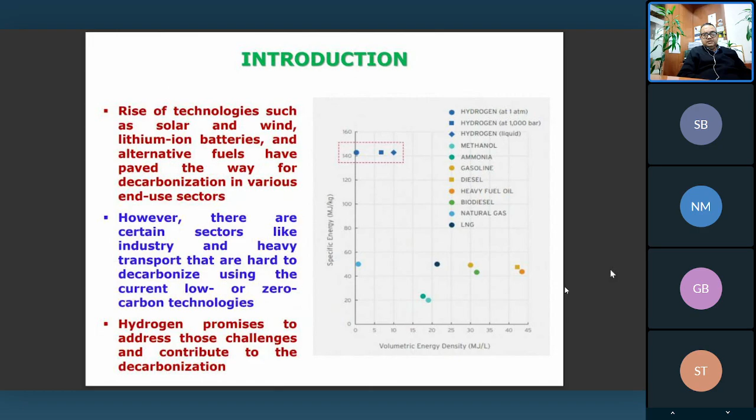So in the next slide, this is the introduction, about how non-conventional energy sources like solar, wind, lithium-ion, fuel cells, hydrogen cells, and other alternative fuels we knew earlier, like wind power, hydro, geothermal, are coming into the picture, through which we are working to decarbonize or mitigate the carbon emission problem under the UN SDG goals.

This is the graph of volumetric energy density versus specific energy, where you can see hydrogen. There are three hydrogens in our circle; one is square, one is rhombus. You can see that specific energy is highest in the case of hydrogen. That's the reason it promises these challenges can be mitigated if you properly go for hydrogen, and that too green hydrogen.

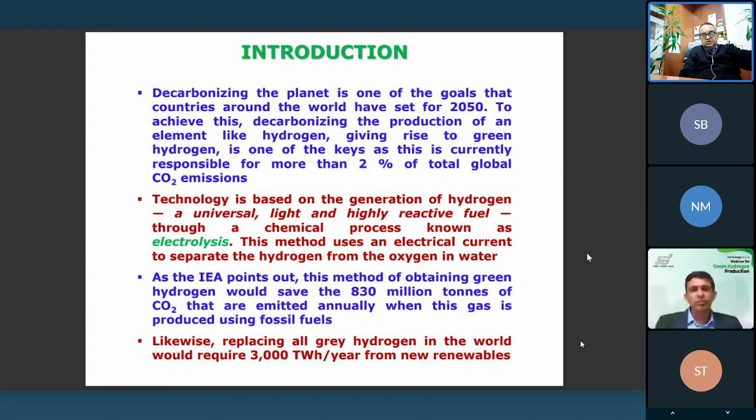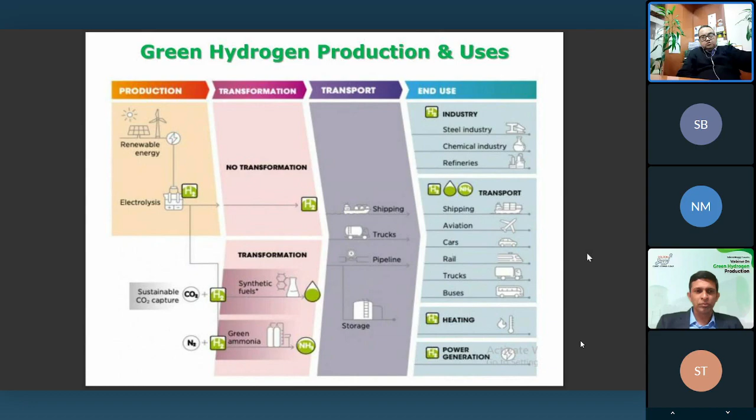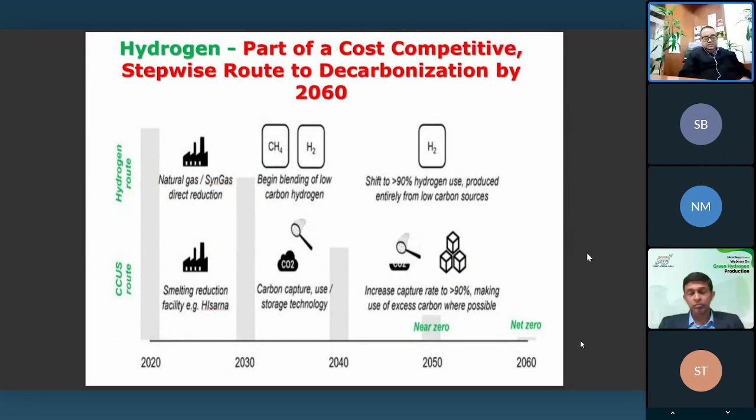However, in the CCUS route, we are using the smelting reduction facility. One example I am showing here is HIsarna. Here carbon capture, use and storage technologies are there so that we can increase the carbon capture rate to more than 90%, making use of excess carbon wherever possible so that we can achieve net zero by 2070. Our emphasis is 2070.

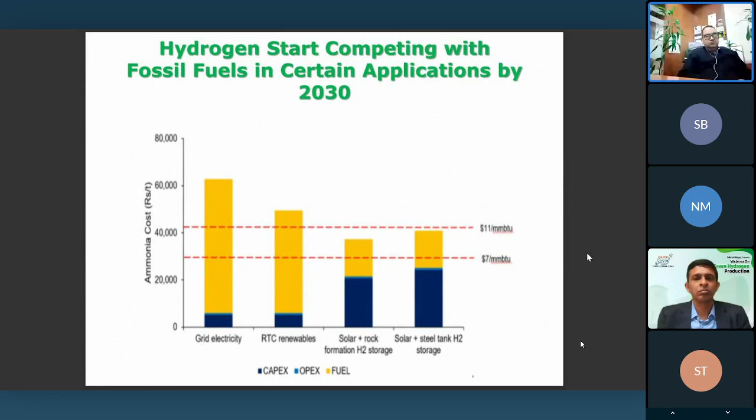So, Dr. Pranjal, do you think the cost today of green hydrogen is high because the cost of renewable energy that we are getting by itself is high? Is that the reason, or is there any other contributing factor? No, there is no other reason. See, the one good thing in green hydrogen production is that the raw materials are very readily available. Water is readily available, then electricity is not much of a concern. The only concern is the electrolyzer.

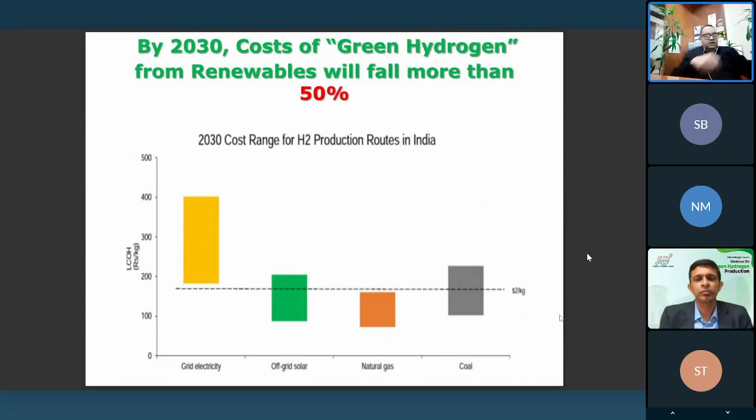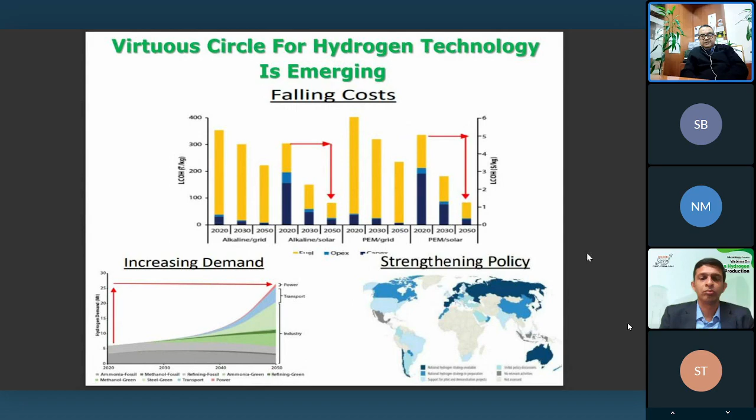In the next slide, I will show you the projected price trajectory for solar based green hydrogen production, meaning power from solar to make green hydrogen. In 2030, the price for green hydrogen is between 1.7 to 2.4 dollars per kg. RTC renewables is around 2.1 dollars per kg, and gray hydrogen is around 1.8 to 2.7 per kg.

But if you go to 2050, green hydrogen cost has dropped drastically to between 0.6 to 1.2 dollars per kg, from 1.7 to 2.4. RTC renewable is dropping from 2.1 to 0.9 dollars per kg, and gray hydrogen will be increasing. It was between 1.8 to 2.7. In 2050, it is anticipated to be between 1.9 to 2.9 dollars per kg.

In the graph, the green line is green hydrogen from on-site renewables. The blue line is green hydrogen from RTC renewables with T&D, transportation and distribution waivers. The central dark blue line is the most competitive blue hydrogen, and gray is the gray hydrogen price range. So the price of green hydrogen from on-site and from RTC renewables is dropping drastically from 2020 to 2050.

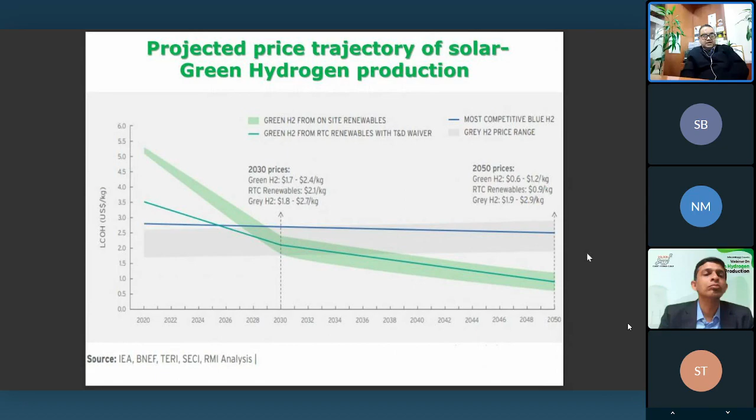In the next slide, Visionary 2030, the electrolyzer target market. So if you see, I'm showing a few colors. The blank is green hydrogen exports, blue is product export incentives, red ones are pilots, and green is mandates, viability gap funding, and addressable demand. So if you see from refineries to visionary demand target, the visionary demand target is the last one, right hand side, that is yellow color.

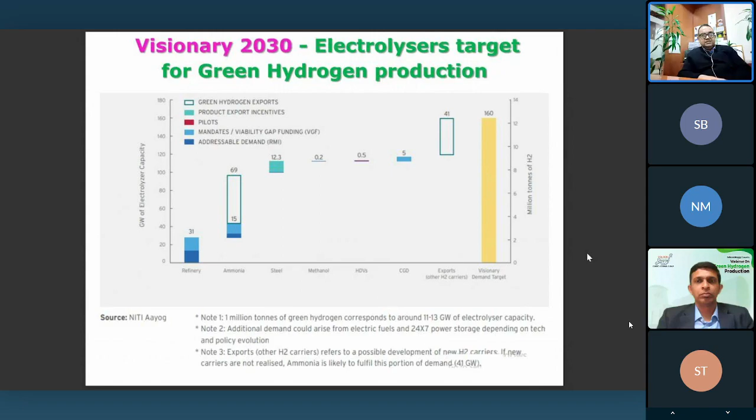So these are some of the driving forces in the next slides for the emerging economics of green hydrogen. The renewable cost will be declining globally. The global hydrogen production outlook shows that by 2050 the production of green hydrogen will be substantially higher, and exponential cost decline is expected for the electrolyzers.

I am already saying this - in case of alkaline electrolyzers or proton exchange membrane electrolyzers, PEM electrolyzers, you can see the cost decline is expected for the electrolyzers.

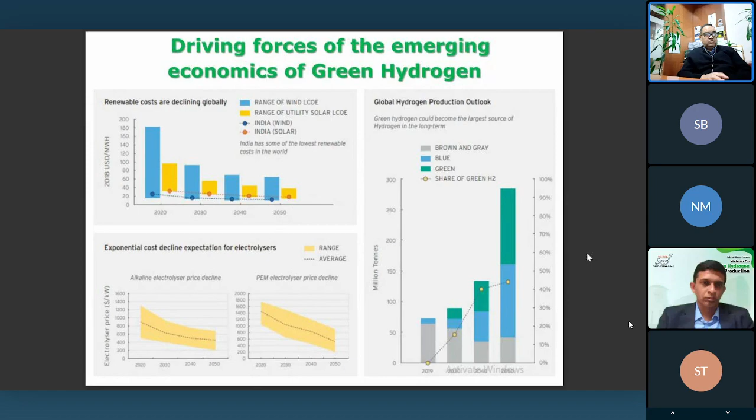If you go to current cost economics of India, green hydrogen production in India - in the next slide we have three parameters shown here, where you can see one is green hydrogen, one is natural gas based hydrogen, and one is coal-based hydrogen. So coal-based hydrogen obviously is the blue one.

This is sourced from RMI analysis, which is based on the green and natural gas, and coal-based figures from TERI and BNEF. So here you can see the green one.

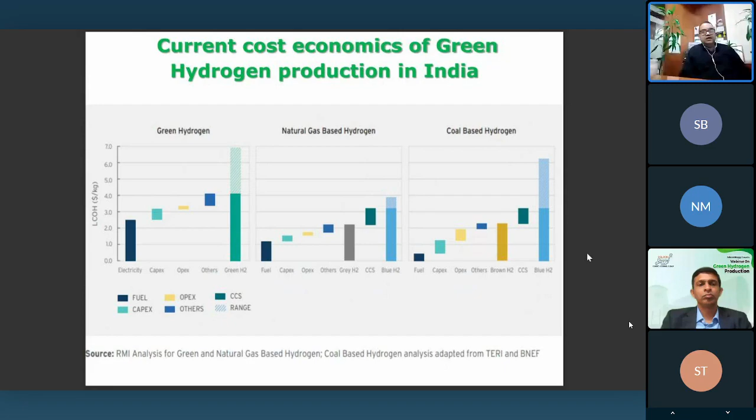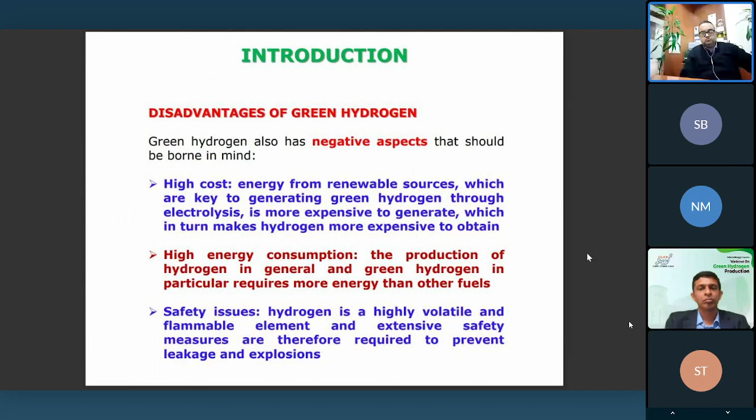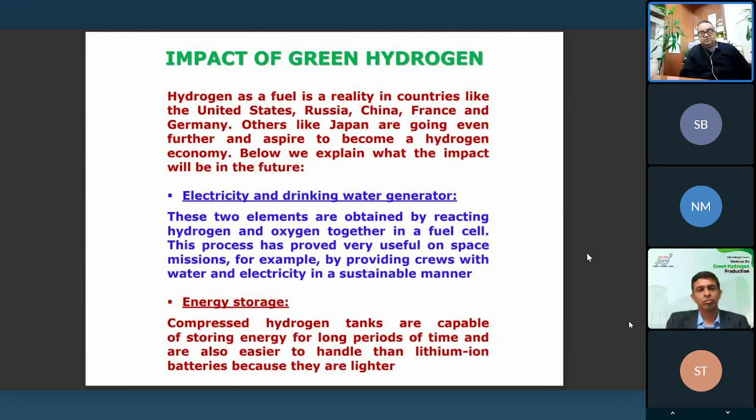What is the impact of green hydrogen? In the next slide: first, it will help in electricity production and drinking water generators. It will help in energy storage, as compressed hydrogen tanks are capable of storing energy for long periods. It can be used in tanks and trucks, and will be useful for transportation and mobility.

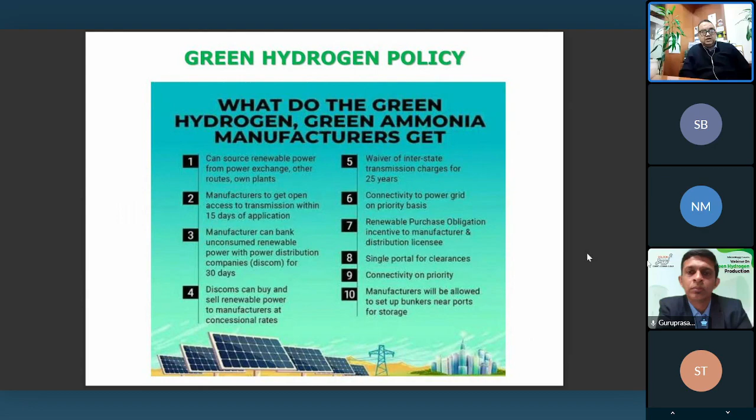Now coming to the next slide, just one more slide. I'm also seeing Ms. Neha, who will be talking a little more about the policies. Please continue. Yeah, she will speak. So next slide, just one pager.

On the technical side, the production process of hydrogen happens in four types. One is the thermochemical process, which itself consists of four types: natural gas reforming, biomass gasification, biomass-derived liquid reforming, and solar thermochemical hydrogen. Second is the electrolytic process, which we discussed. Third is direct solar water splitting, using photoelectrochemical or photobiological processes. Fourth is biological processes, where microbial biomass conversion and photobiological methods occur.

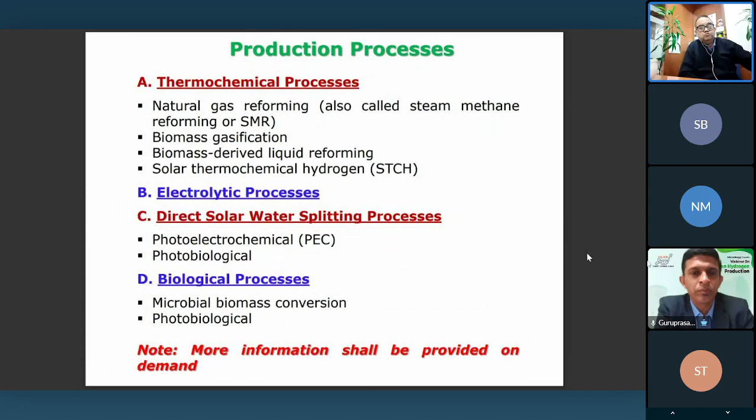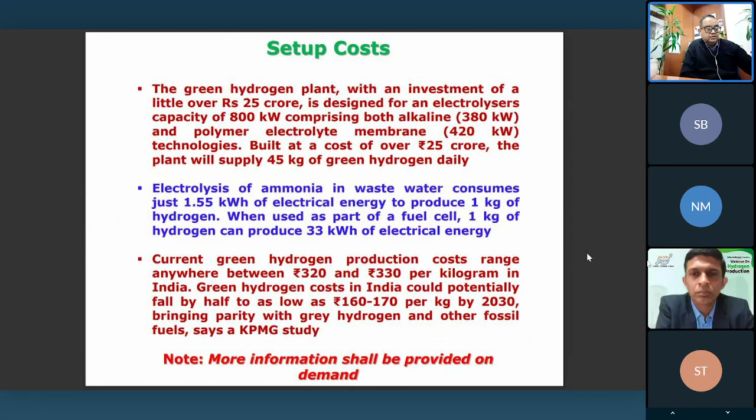So this is my small presentation where I tried to cover three aspects: technical, commercial, and also the present situation in comparison to earlier situations happening in our country and globally. Thank you once again for your patience.

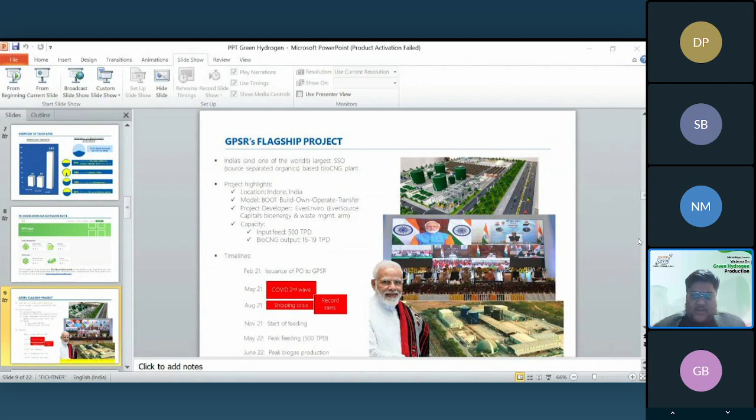Maybe you can just give me the access. I can present the screen. That's fine. Are you able to share now? Yeah. We'll try it, 1 second. Sure. Yeah, okay. Now it's visible.

Okay. So, as part of the GPSR, which is being led by me, this is a projects platform under which we are executing many biofuel projects. The first couple of projects are bio CNG, which are paddy straw to CNG, coming up in Hisar and Panipat in Haryana. Apart from this, our focuses are on green hydrogen, on biofuel and energy crop using afforestation, and a 2G ethanol project that is coming up in Mizoram on bamboo. So these are the other projects that we are doing.

On green hydrogen, we have a team comprising of Mr. Milind Patke, who is the president of biofuels at GPSR. He was earlier the executive director of BPCL. We have Mr. Shantanu Roy, who is the principal advisor on hydrogen, who was the executive director marketing of GAIL. Along with him, we have Ram Kumar, who is an advisor to us and also the India head of High

Gear. So GPSR already has a tie-up with HyGear for the alkali-based electrolyzer. HyGear is a company from the Netherlands which has over 100 installations throughout the world on green hydrogen. We are also working closely with AdWord for the solar aspect, that is the power requirement for green hydrogen.

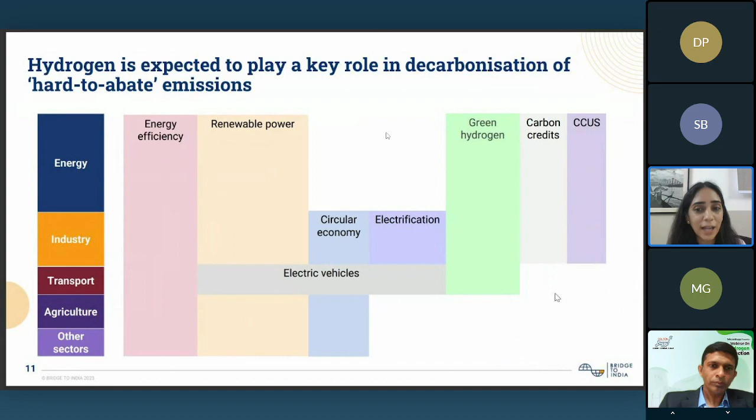It can go across industries, be it energy, industry, and transport, and it is only because of its wide applicability, as it can be used as a fuel, as a feedstock, or even as energy storage, which has really made green hydrogen the talk of the town and touted as the fuel of the future, because it's truly unique because of its wide applicability. And on the next slide.

This is basically showing that in the range of decarbonization levers, green hydrogen can really fit in three different spaces: as an alternative fuel, energy storage, and even in sustainable transport. And on the next slide, we can see that this is especially important for hard-to-abate sectors which are desperately looking for a decarbonization tool, something like green hydrogen, which has given them a ray of hope.

Industries like iron, steel, cement, fertilizers, refining, and heavy transport are expected to become some of the biggest consumers of green hydrogen, because they're really looking for not just a cheaper, but a more environmentally considerate alternative to decarbonize their businesses.

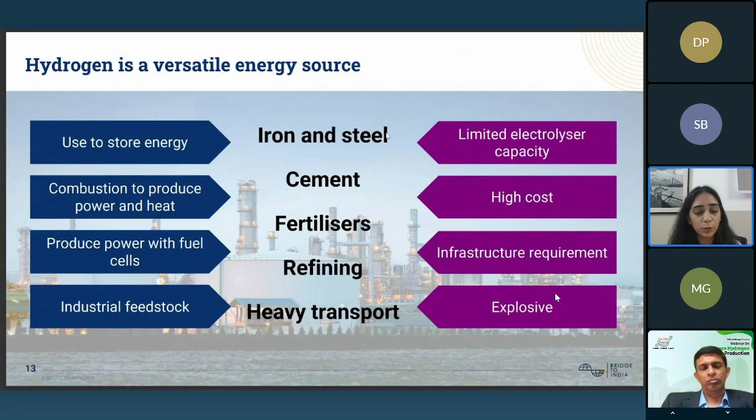That being said, because this market is really in the nascent stage, there are very critical challenges limiting its wide-scale adoption, which include limited electrolyzer manufacturing capacity in the country at the moment, the really high cost, the large infrastructure requirement, and the physical properties of green hydrogen that make it explosive and corrosive. That really needs to be taken into account before we think about making green hydrogen a mainstream fuel in the country.

In the next slide, if we look at the total supply chain of green hydrogen, at each step, I want to focus that we need policy support. We need specific policy intervention at each level of the supply chain, because every step is very unique. The whole concept is very new to the country, starting with renewable generation and transmission. We know that the market has become very mature, but the cost is still high to make green hydrogen at a competitive price compared to grey hydrogen.

Renewable power is one of the most important and capital-intensive components in producing green hydrogen. Green hydrogen production requires a relatively stable supply of power, which is very difficult when working with renewables, which are very intermittent. We need that to optimize electrolyzer utilization rate and performance efficiency. A stable production rate is also desirable to minimize investment in hydrogen storage infrastructure, which would mean we would need investment in power storage facilities.

So about 1 million tons per annum of hydrogen production requires about 18 to 20 gigawatts of renewable power generation capacity, which, if tied up with sufficient storage capacity, would lead to approximately $20 billion of investment, which is quite high. And if you want to transport hydrogen, it would need a lot of investment in making the infrastructure available, compared to transporting renewable power, which would require less investment because the requisite infrastructure is already there. So it is a much easier prospect to transport renewables than to transport hydrogen.

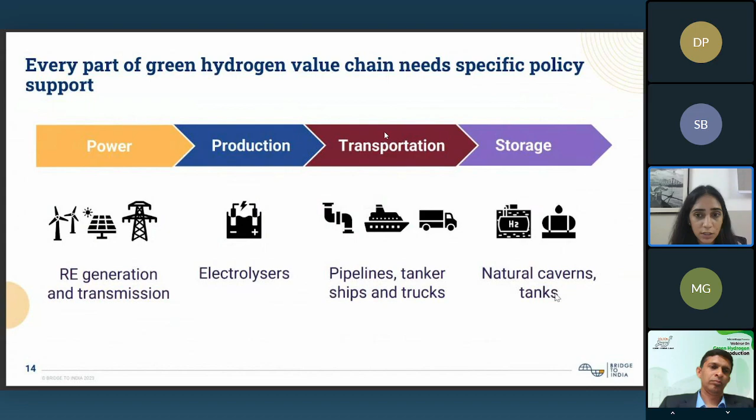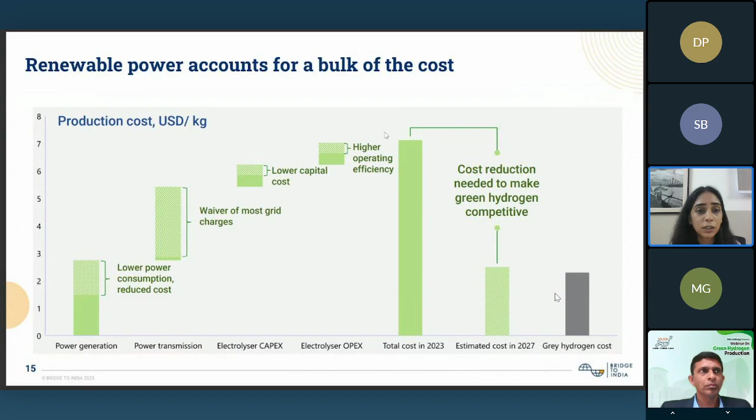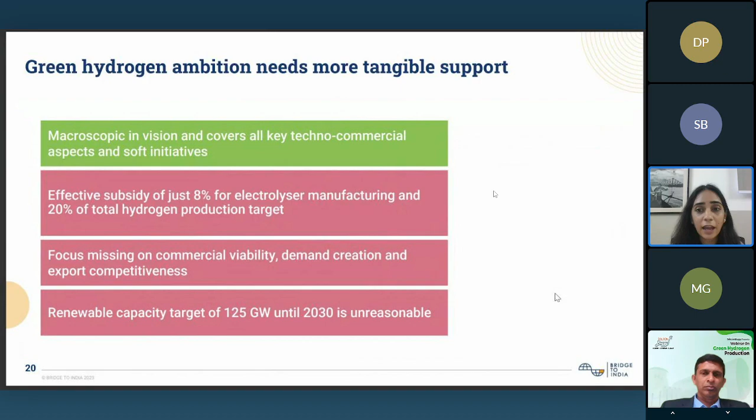So the capacity addition that we are envisioning is a bit too much for us to even think about and maybe not possible. And even if we look at the total budget that has been allocated as subsidy, it is still a bit too little and maybe not enough to make a difference.

And if we talk about the initial green hydrogen policy also, which provided incentives like waiver of interstate transmission charges for renewable power for 25 years, that was already in place. And the green open access rules already have made a provision for all ISTS renewable projects to be exempted from the ISTS charges. There is open access connectivity approval that will be given in 15 days and open access banking facility until end of each month. That is something that the policy also proposed initially.

But these are under the jurisdiction of the states, and it's very happy to know that many states like Andhra Pradesh, Karnataka, UP, Madhya Pradesh, West Bengal, a lot of these states have started to adopt these rules, and they are going to provide these facilities. So that is great news for all of us. But there are still a lot of policy requirements that are missing in this policy and the mission document.